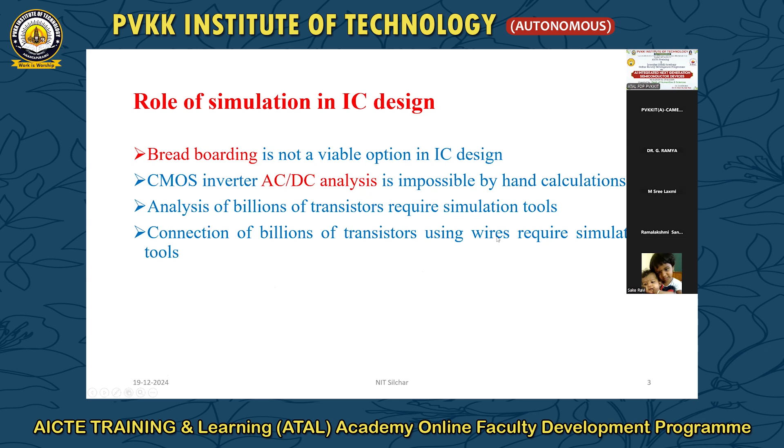Just now I told you that to simulate millions and billions of components, we must use simulation tools. This is the importance of simulation. Now I'll discuss the role of device and interconnect models.

For any simulation tool, the heart of the tool is a model. If the model is accurate, then the simulation results will match the post-fabrication results. If the model is inaccurate and does not describe the behavior of the device or interconnect under all possible conditions, then whatever optimization you do at the circuit level is of no use. The fundamental component, the device model, must be accurate. Only then is there a possibility of simulation results and post-fabrication results matching.

Otherwise, it is not possible to get accurate results as per the specifications given to you.

Every circuit simulator should have built-in models for both devices and interconnects. Interconnects are needed to connect various devices, circuits, and systems. There is a clear role of these interconnects at very high frequencies - they cause various parasitics, RLC components, and lead to crosstalk effects and ringing effects. There is a great role for the discussion of interconnects.

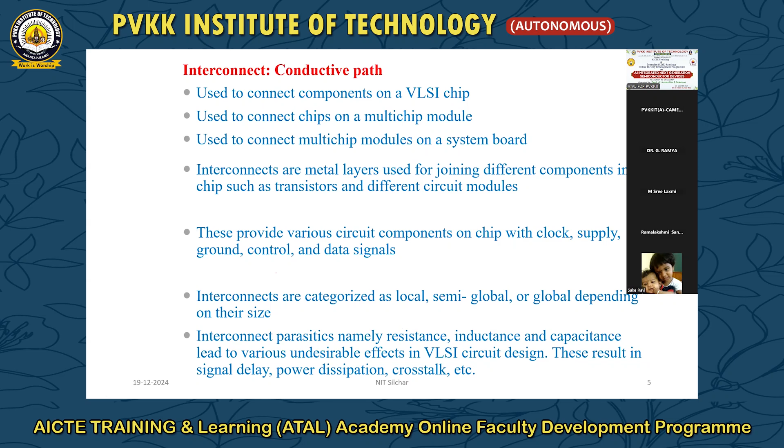Every interconnect has some parasitics, like resistance, inductance, and capacitance. These are the culprits behind the undesirable effects in VLSI circuit design. These lead to delay, power dissipation, crosstalk, and ringing.

I told you about various models. We need an accurate model. The basic model of the interconnect is like a simple wire.

This was valid for long channel devices, where device delay dominates the wire delay. For long channel devices, take MOSFET for example — for long channel devices, device delay is dominating over the wire delay.

Whereas if you go for deep submicron designs, after scaling, the long channel MOSFET becomes a short channel MOSFET. After this scaling, interconnect delay dominates the device delay. For long channel devices existing in the IC or processor, the devices dominate the wire delay.

Whereas for short channel MOSFETs, the current MOSFETs, the interconnect delay is dominating the device delay. Any IC or system needs devices, and we need wires to connect those devices. The overall system consists of devices and wires only.

In the current scenario of deep submicron designs, the wire delay is dominating the device delay. This means overall devices are becoming faster, whereas wires are becoming slower. Our main target is to connect devices using wires, but wires are slower compared to devices, so our target is to make wires faster.

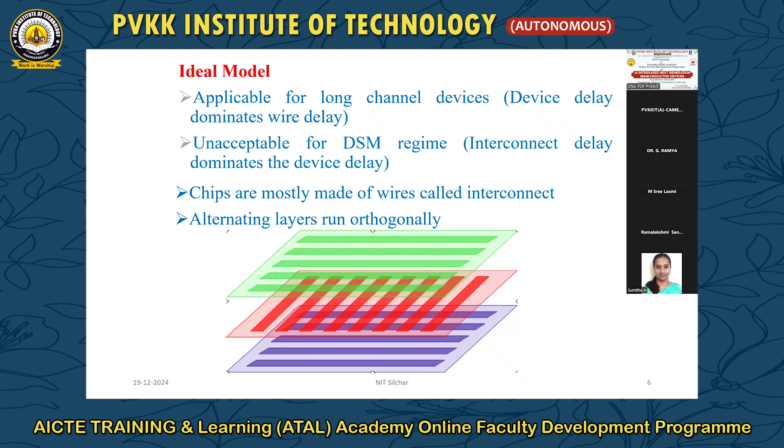Whereas local interconnects, which are used to connect transistors, are very narrow. They are very narrow because we are dealing with nanometer MOSFETs, and accordingly we scale down these local wires.

The way we are scaling down the local wires, we are unable to scale down the global wires, because the global wire lengths especially we are unable to scale down. As compared to the older days, current processors, every year we try to integrate more components to add more functionality.

When more blocks are in the processor compared to a 10-year-back processor, we need a lot of wiring, a lot of power supply wiring, and a lot of clock routing wiring. That is the reason the global wire lengths are unable to scale down the way we are scaling down the lengths of the local interconnects.

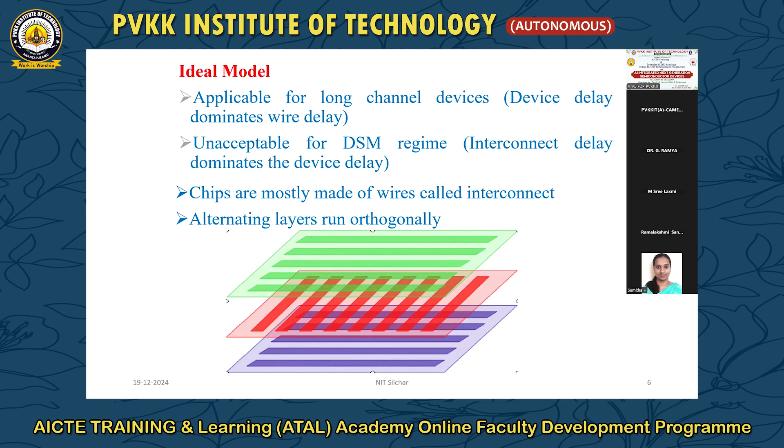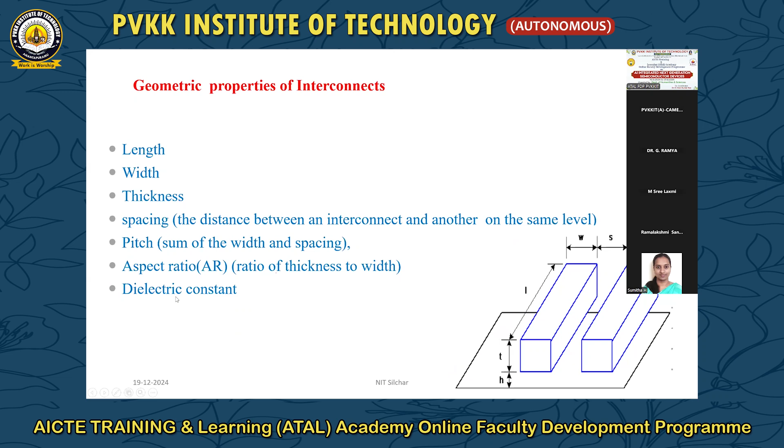These are the main properties of interconnects: length, width, thickness, spacing, pitch, aspect ratio, and dielectric constant.

130 nanometer, 90, 65, 45, 32 nanometer, the y-axis is about the relative delay. The top line describes global interconnects without repeaters. Basically, here we use repeaters, which are used to reduce the delay.

Especially for global interconnects, we use repeaters to reduce the delay. As I told you, wires in current deep submicron design are dominating the device delay. In the entire system, we have devices and wires only, and wires are slower while devices are faster.

But we want to make the entire system faster, so we try to make wires also faster. For that, we try to use repeaters, or otherwise we try to use some innovative interconnects, like optical interconnects, or CNT interconnects, or some flexible interconnects.

As I told you, when we move into deep submicron technologies like 250 nanometer, 180, 130, 90, the top one is the blue one. Global interconnect wire delays keep on increasing. This is the main bottleneck.

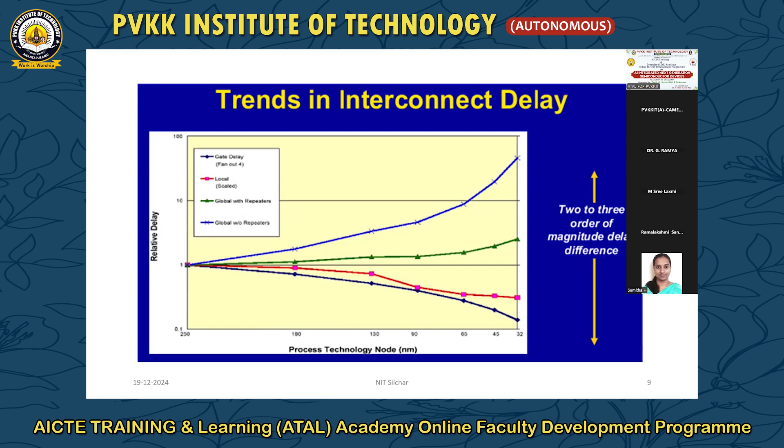And this is about the interconnect delay under different scaling rules. I told you these are the main geometrical parameters like width, thickness, spacing, oxide thickness, length. Here the main conclusion is when we go for scaling, ideal scaling and constant thickness scaling.

Here, local interconnect delays - this is about the local interconnect delay. The crux is, for the short wires, resistance - we take this for any parasitic wire.

I told you there will be RC delay, RLC delay. When we are considering RC delay, the inductance effect is ignored. At low frequencies only we can ignore the effect of inductance, whereas at higher frequencies we must include the effect of inductance also. For short wires, if we are taking RC delay, at lower frequencies your resistance scales by 1 by S, whereas capacitance scales by S.

The entire RC delay is almost the same, because when we scale down the geometries, width is scaled by S parameter, where S equals 0.7, so width is scaled down by 0.7. Thickness also scales down - almost all parameters are scaled down. Then the overall RC delay is almost the same, because R is scaled by 1 by S, C is scaled by S.

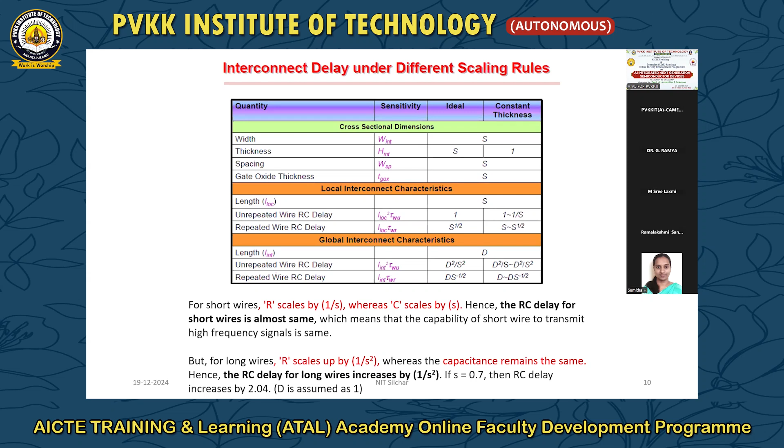With technology scaling, gate delay decreases, whereas wire length increases, and again wire delay also increases.

These effects cannot be removed, meaning we cannot make them zero. In presence of this capacitive effect, inductive effect and parasitic resistance, our signal should have good signal integrity and again power integrity also. Meaning in presence of these RLC components, glitches and noise also, the circuit should have good noise margin.

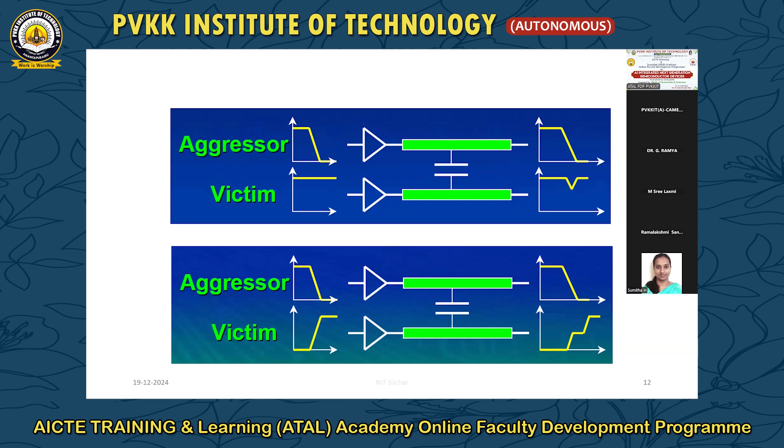When a circuit is having good noise margin, then even the presence of these small glitches cannot affect the output. That is the beauty of digital signals as compared to analog signals.

These are the main challenges: delay uncertainty, overshoot uncertainty, crosstalk uncertainty, power consumption, and electromigration. Basically, electromigration means at a particular point of interconnect, if there is a high amount of current flowing, there will be a high current density. When there is high current density at any point, it leads to migration of molecules and atoms from that point, which leads to opening or shorting of the wire. This is a permanent damage, due to the movement of these particles.

When a wire is open or short, then the corresponding processor blocks may not get sufficient signal. Then it becomes a failure of the corresponding processor. This is the important thing we have to discuss about regarding reliability issues.

And these are the main challenges: power consumption and crosstalk uncertainty. Delay uncertainty and crosstalk uncertainty mean that for any wire, local or global, once we apply some signal, exactly after how much time the signal will be available, we cannot estimate precisely, especially in current deep submicron level designs.

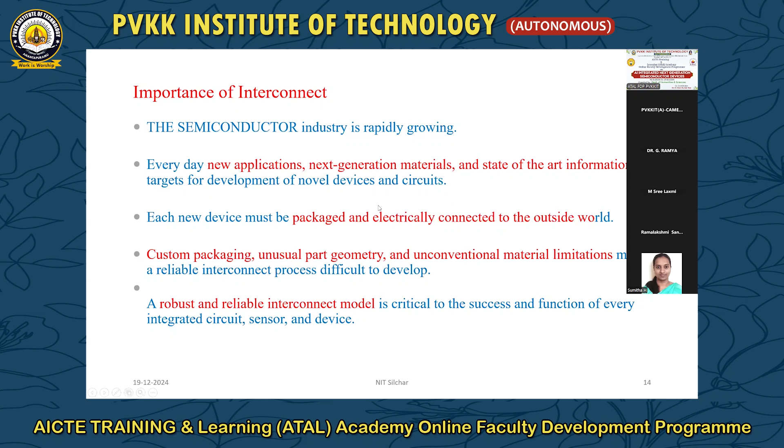And these are the major issues in interconnect delay. Wires are generally placed very close to each other because there is no other option, since wafer area is very costly. We try to integrate wires and devices closer. But if you keep them closer, there will be more parasitic effects like coupling capacitance and mutual inductance. If you separate the distance, these effects will be nullified, but we always try to go for area efficient designs.

Always there is a trade-off. That is the reason we need some optimal geometry, optimal spacing of wires. If we place wires very close together, there will be large coupling capacitance and large mutual inductance, which leads to higher crosstalk noise, and that leads to crosstalk induced delay. These are the multiple effects we will be having.

There are multiple models: simple short model, simple capacitance model, RC model, RLC model, RLC with frequency dependent parameters, transmission line model, coupled transmission line model, and full EM analysis of coupled elements. As we move from the simple short model to full EM analysis, accuracy will be good, but it takes more computation time. Full EM analysis means we must use numerical methods like finite difference time domain method, or finite element method. If you use those methods, the accuracy will be good.

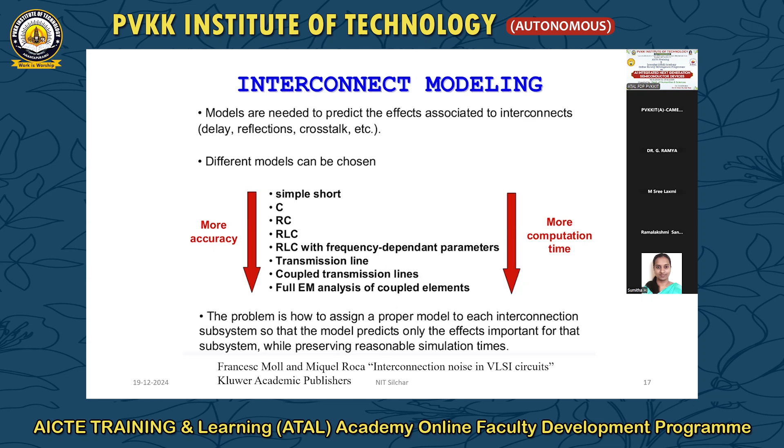This is the main important point. Whatever important effects we need, that has to be predicted. If you want to predict all the performance parameters and it should be more accurate, then the model needs all the parameters. To run all the parameters, we need a lot of computation time. Always there is a compromise between accuracy and computation time.

These are the various existing models: Elmore model, Bakoglu and Sakurai, like this. This is a very old model, the Elmore delay model, and here is the fundamental equation of the Elmore delay model. This is valid only for short interconnects, and the model is purely based on RC interconnects, where the delay is directly quadratically proportional to the length.

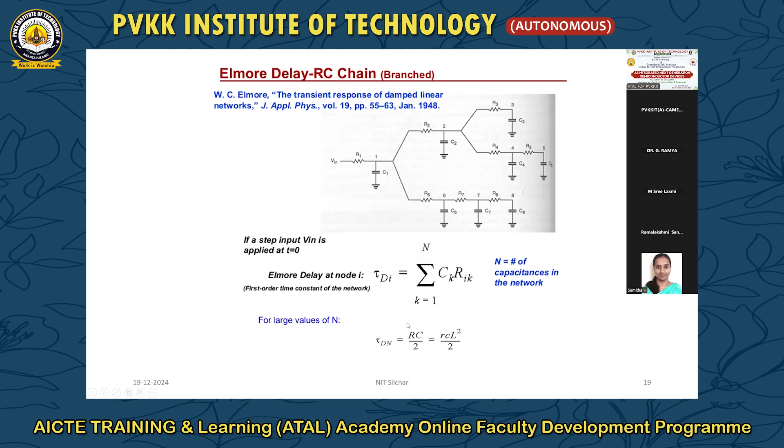Another model here: in case of RC delay, Elmore RC delay increases quadratically with its length. We have observed that the insertion of a buffer reduces the delay proportional to its length. Instead of varying quadratically with length, now the delay is proportional to its length. Observe the difference here. If we add repeaters at different points of the wire, instead of increasing the wire delay quadratically, it will vary linearly with the length.

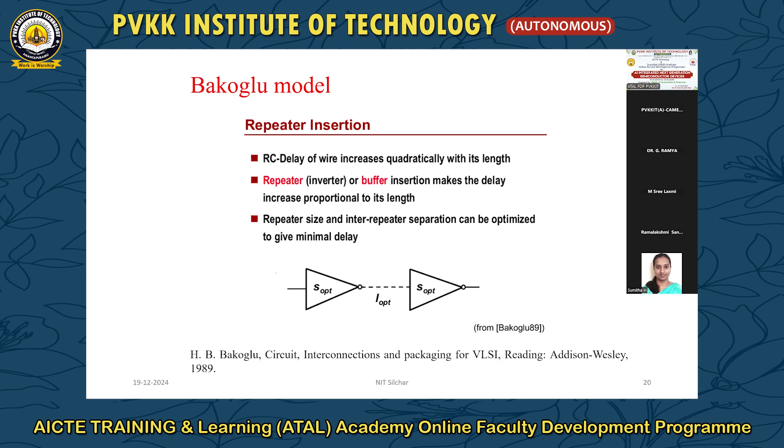This is the big difference between having repeaters and not having repeaters. Repeater size and inter-repeater separation can be optimized to get the minimal delay. And another model is the Sakurai delay model, where they have estimated the crosstalk.

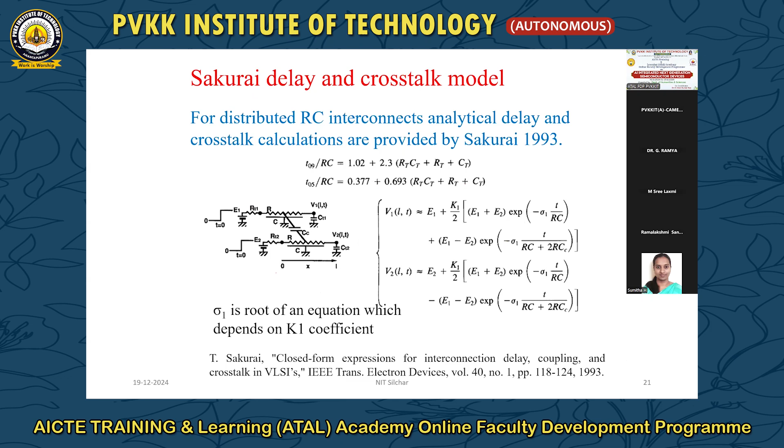And this is about another model, the RLC model. Till now, whatever I have discussed, RC models have delay estimation error very high, almost 100% error also there. Whereas if you include the effect of inductance, then the delay estimation error will be within 15% only.

And our main intention, our target, is to get the delay estimation accuracy to be almost 99%. Meaning the mathematical model we develop has to give results correctly matching the simulation tools, or otherwise, fabrication results.

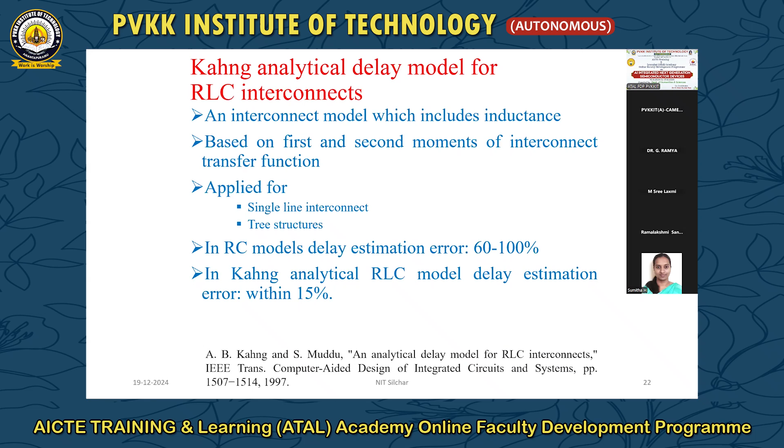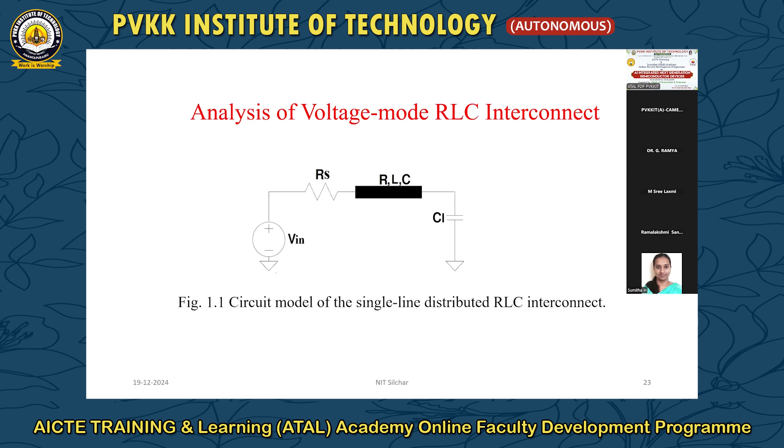Okay, now we'll discuss the simple structure, voltage mode RLC interconnect, and these are the basic telegrapher's equations. The variation of voltage here is a function of x and s. X is nothing but the position, S is our Laplace parameter. These are the variation of voltage and variation of current, which are purely based on the RLC components only.

And the solution of this equation is written as an exponential matrix, where phi is nothing but 0 minus z minus y 0. These are impedance and admittance. Z is impedance, Y is admittance. Z is impedance R plus SL, Y is admittance SC, where L is the length of the interconnect.

Here we have taken V of L comma S as the far end output voltage, and the far end current is a function of the near end voltage and current. This first equation has an exact representation, and this is the frequency domain solution.

And there are some models here. The function is in the form of some cos hyperbolic and sin hyperbolic, where z and y are nothing but R plus SL into SC.

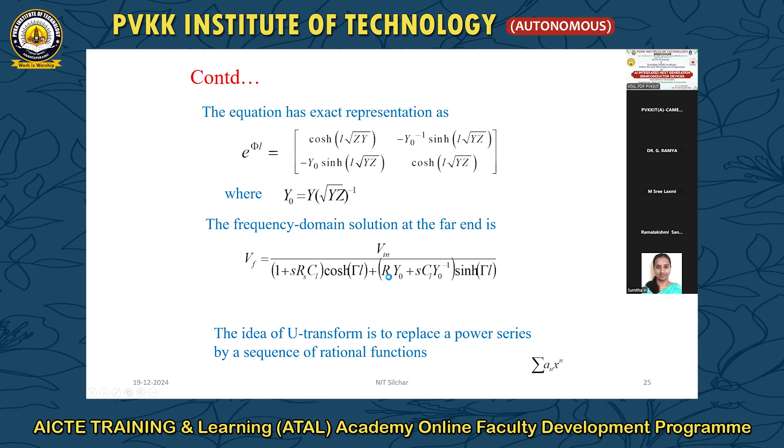This is about the U transform, where we try to use some approximate function such that the transfer function, this is our transfer function, output by input, will be simplified so that we get the time domain function in a simpler fashion. We use this transform where the time domain function is represented in the form of some poles.

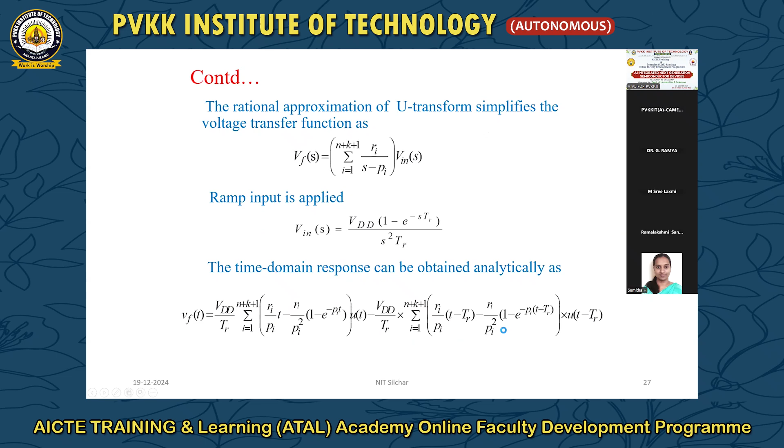Where pi, these are poles only, and these are the parameters, interconnect parameters, and power supply.

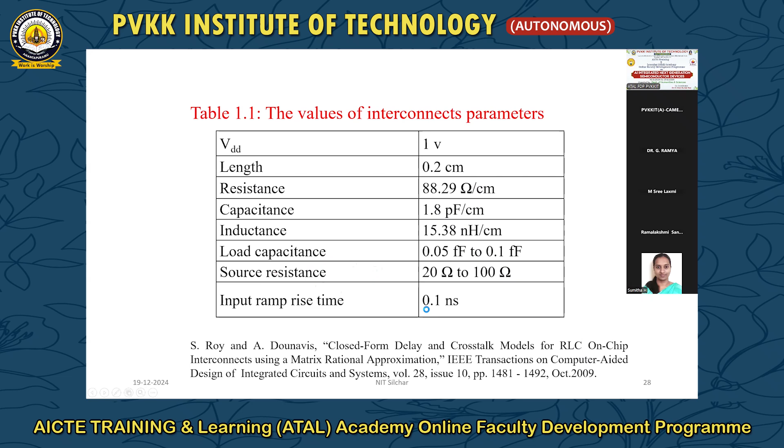This is VDD, length typically we have taken 0.2 centimeter. These are the parasitic capacitances. If you observe, these parasitic capacitances are nothing but per unit length parameters. And load capacitance we have varied, source resistance we have varied, and input ramp we have taken with a rise time of 0.1 nanoseconds.

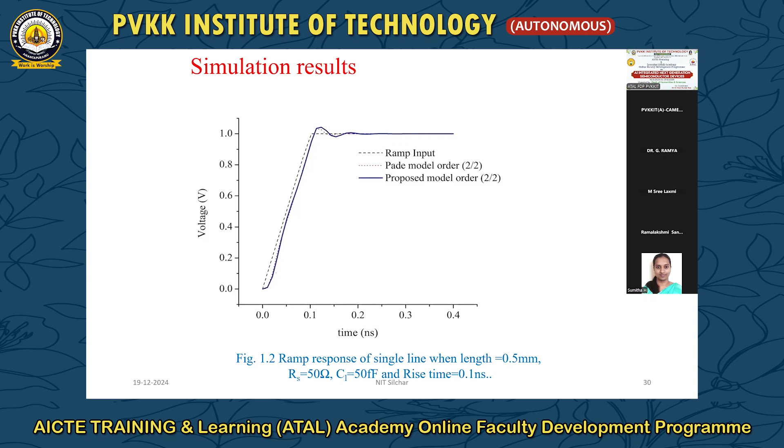And these are the advantages, and these are the ramp response. Ramp response of a single wire, and these are the proposed models. Here if you observe, there is a difference between input and output, that is called propagation delay. Propagation delay means the point where input touches 50% of the peak, and the point where output touches 50% of the peak - the difference is called propagation delay.

Previously I discussed about the single wire. Now this is our H-tree structure, an H-shaped structure where we have multiple nodes. The advantage of the H-tree structure is for clock source - when we apply clock source at the initial point, at various nodes we will be getting the clock with equal delay, same delay.

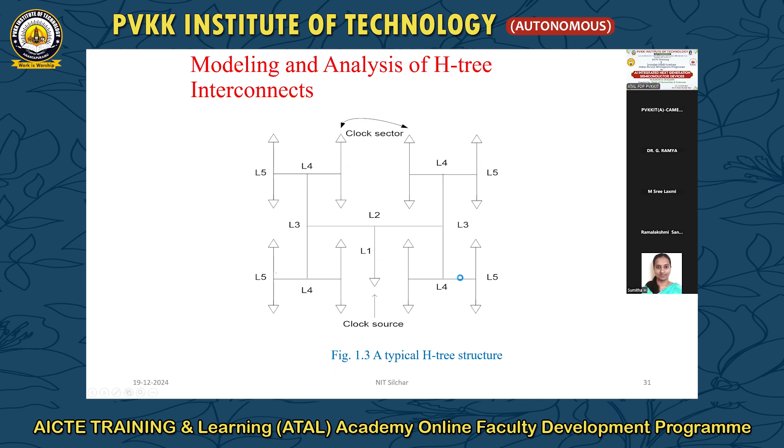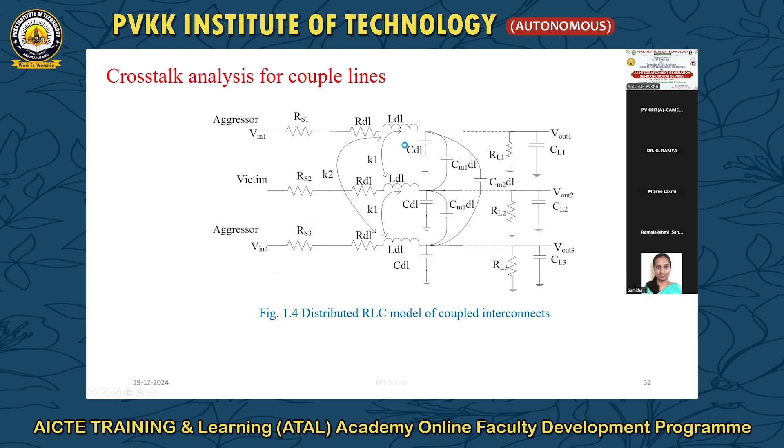And this is about when we are having multiple wires. This is our mathematical analysis where we try to find out the crosstalk from one wire to another wire. When there are multiple lines, these are the parasitic components, and these are the capacitive means - coupling capacitance are there, and mutual inductance, self inductance are there.

From one wire, we have taken three wires. For three wires, there will be some capacitance and inductance parameters, and again these are the wire resistances, and we observe these are distributed parameters, not lumped parameters. At low frequencies only we can use lumped analysis, whereas for higher frequencies we must use distributed parameters.

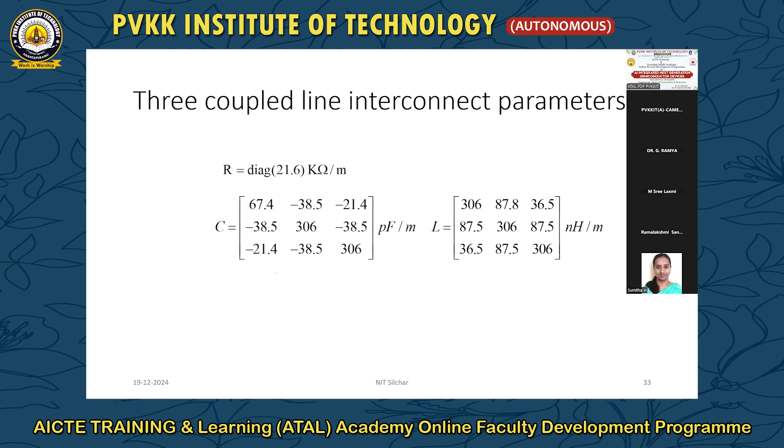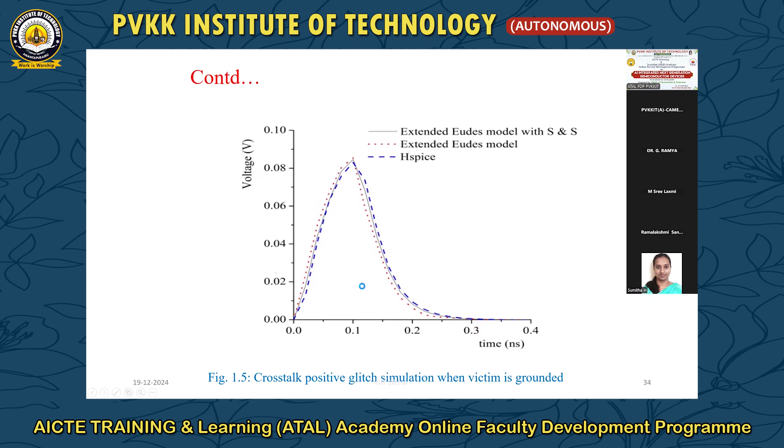And this is about the noise crosstalk positive glitch simulation. When victim is grounded, instead of zero signal, we are getting some noise. This noise is due to the electrical and magnetic field coupling only.

Till now we have used copper interconnects. Copper interconnects suffer from significant electromigration problems and higher resistivity that leads to higher RC delay. Overall delay will be more if we use copper interconnects, and they have other hurdles like burnout time at current density of 80 megaAmpere per centimeter square. There is a burnout time of copper, and even though it has some good advantages, because of these problems - burnout time and higher delay and electromigration problem -

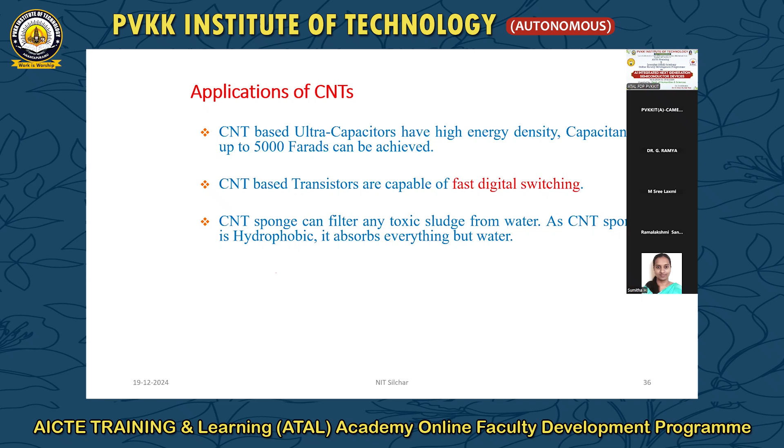we go for CNTs, carbon nanotubes. These are used for fast digital switching, and this is nothing but CNTs as interconnects. These have different versions: graphene, single wall nanotube, multi wall nanotube. These are possible replacements for copper interconnects due to their large conductivity. If conductivity is large, then resistance will be less, and they are faster also. For higher switching applications we use these CNT interconnects, but these are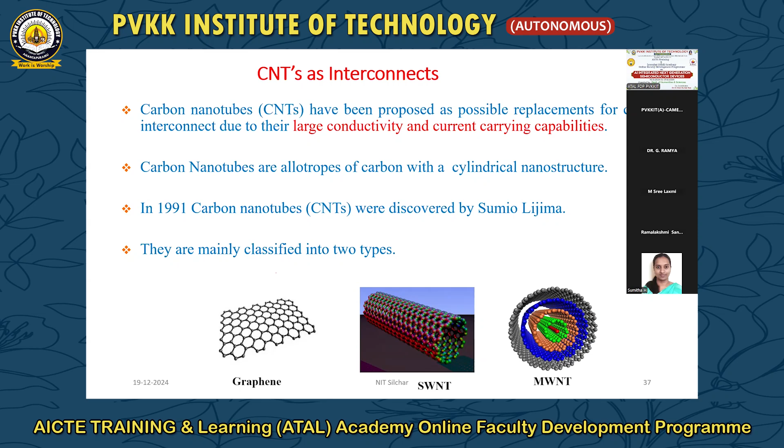allotropes of carbon with a cylindrical nanostructure, and these are the main properties of CNTs. They have very low resistivity, higher conductivity, good current carrying capacity, and very good temperature stability - almost 2800 degrees Celsius in vacuum and about 750 degrees Celsius in air.

And these are one dimensional, and they carry large current, almost 1000 times more than copper. Their burnout time is very high here. They are able to withstand even large current density, almost 1000 times more than copper, because

the main problem is when we go for high-end systems, supercomputers, where people are trying to work with high amounts of computing. For high amounts of computing, we need lots of computations, meaning lots of power supply. For that, electromigration problems may occur for copper wires, where the wires on the processor may burn out. As I told you just now, at any point if current density is very high, that leads to movement of molecules and atoms, which leads to opening or shorting of the wire. That is the problem of the copper wire.

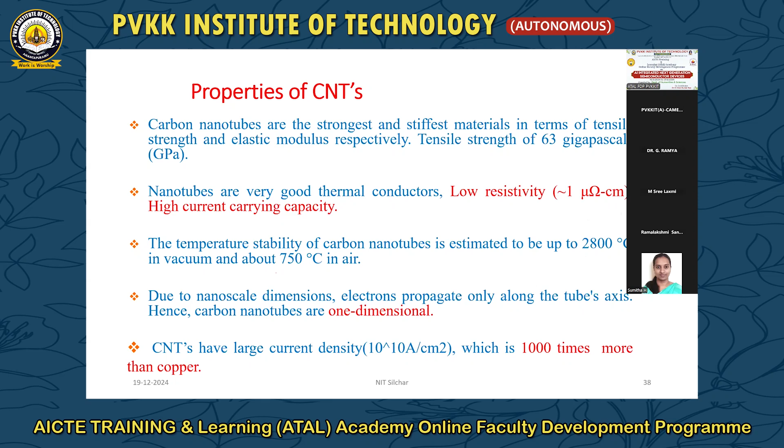And this is the model of CNT interconnects, simple CNT interconnects, and these are the various parameters. Here also we use RLC modeling only.

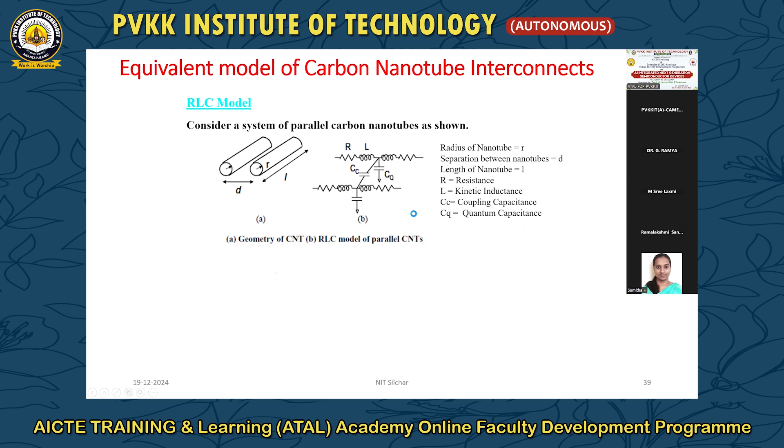Now I'll discuss ML based physical VLSI physical design. These are the main crux. Employing AI and ML algorithms in VLSI design and manufacturing reduces the time and effort. Especially time and effort means, when we try to integrate ML algorithms with the current existing tools, they are able to work in a faster way. ML based tools are an alternative to the current simulation tools in terms of good accuracy and very less computation time.

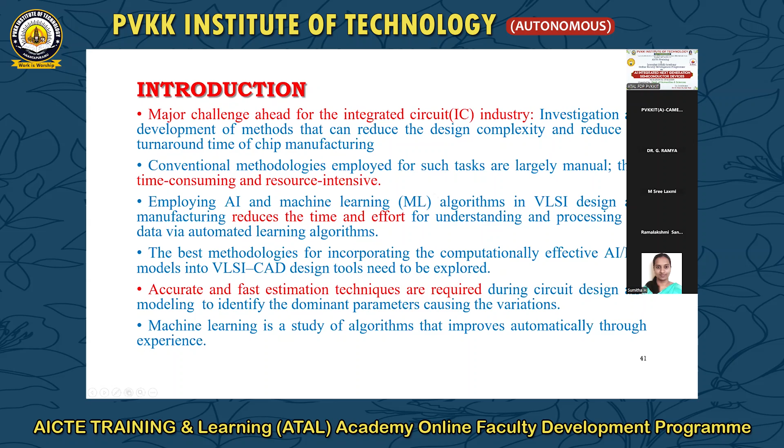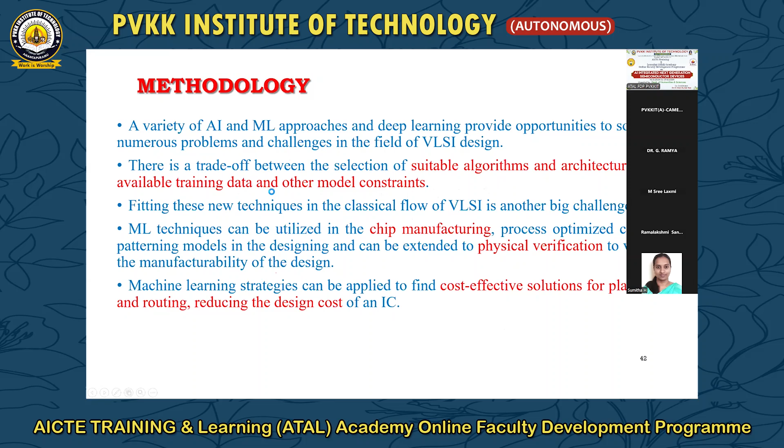And there is always a trade-off between the selection of various ML algorithms and architectures with available training data and other model constraints. And this is the flow chart of the ML model.

For ML we need a data set. We try to get the data set from the HSpice netlist or maybe Cadence netlist. That data then we have to process.

Then after that we do normalization, to normalize the input and response values, because some input parameters are like rise time. Suppose rise time, I have taken rise time as 0.1 nanoseconds. Length I have taken as a couple of millimeters - millimeter means 10 power minus 3. Rise time is 10 power minus 9. Voltage I have taken as another input parameter, volts. Different inputs with different ranges. That is the reason if you normalize all these input parameters, then it will be good.

The model will be more effective. That is the reason we must normalize all the inputs such that the data will be in a proper format, and we have to separate the data into training data and testing data, and we use some modeling, meaning we have to train the model. Then model evaluation we should do.

And if we are getting the desired accuracy, then that is the final AI model. If the corresponding model is not able to predict - maybe device delay or power dissipation, or whatever performance parameter you take - if it is not predicting, then you go back to the ML model, and you just optimize the corresponding parameters till you get good accuracy.

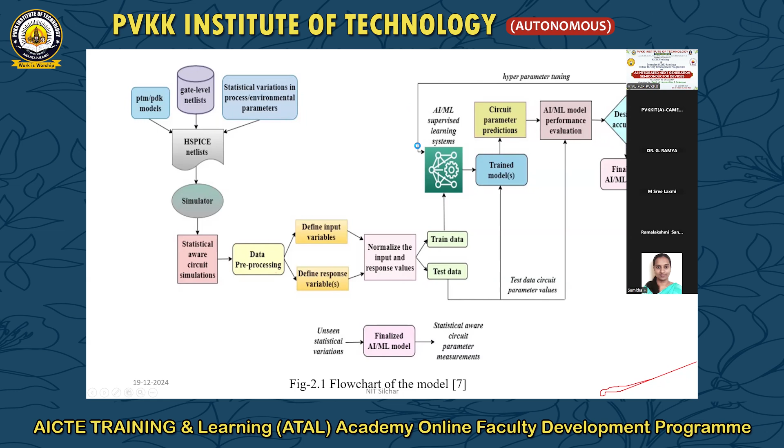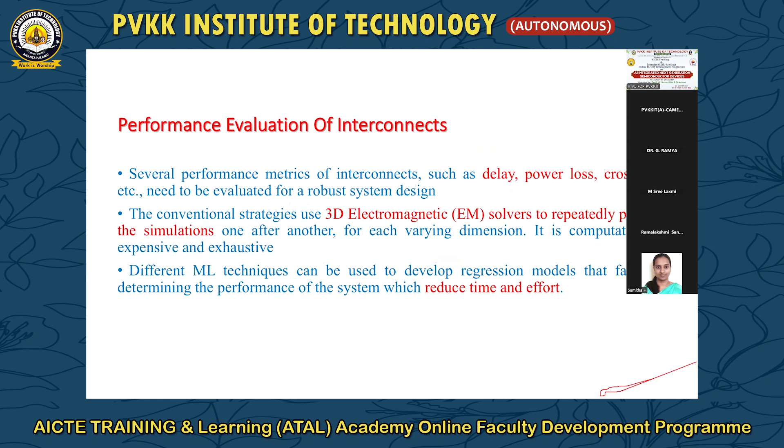These are the several performance parameters like delay, power, crosstalk, and different ML techniques we use. Our main intention is to reduce the computation time with good accuracy, and this is about the optimization.

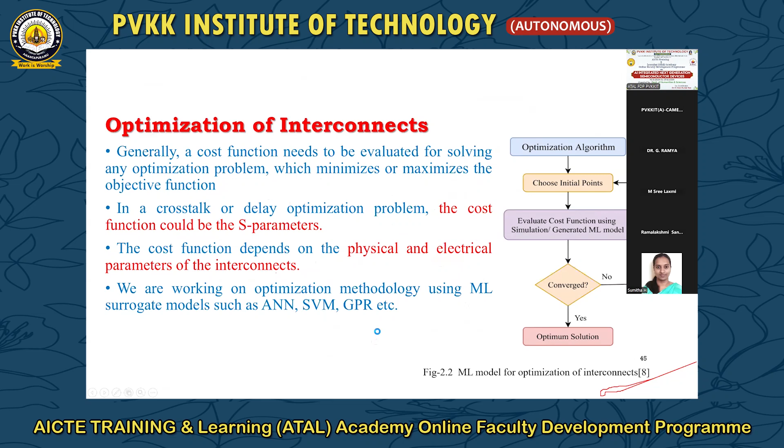We use various surrogate models like ANN, SVM, GPR. Here data mining and ML build a model based on sample data called training data, and we try to get predictions and decisions without specifically programming. Data mining is also about algorithms, but data will be explored through unsupervised learning.

We try to collect the data from existing simulation tools, and the corresponding data we use to train the model. We use one technique called clustering, where a simple example I have taken is a transmission line having multiple poles.

We use some clustering technique such that we try to find out the dominant pole. The dominant pole decides the performance, where we try to compare the performance with the exact performance, and there will always be some accuracy issue, but we try to compromise between accuracy and computation time.

We use clustering technique. This is a simple example I have taken, like a fourth order system with poles -1, -2, -3, -4, that we are converting into the dominant pole cluster and next dominant pole cluster. Then it becomes a second order system. The fourth order system takes more time, so we use pole clustering technique to reduce the order of the system.

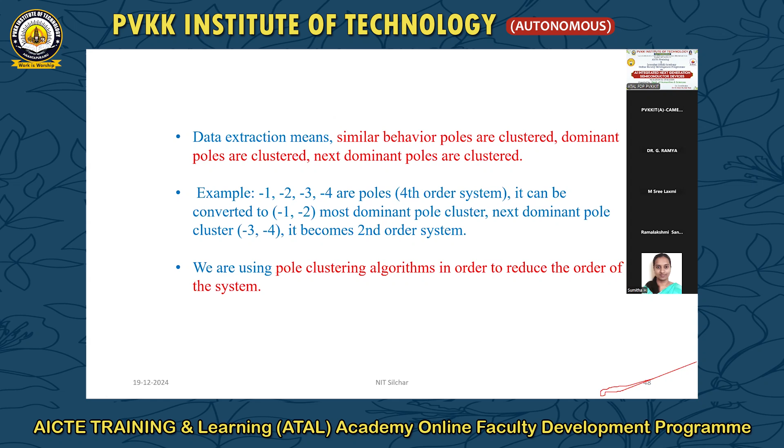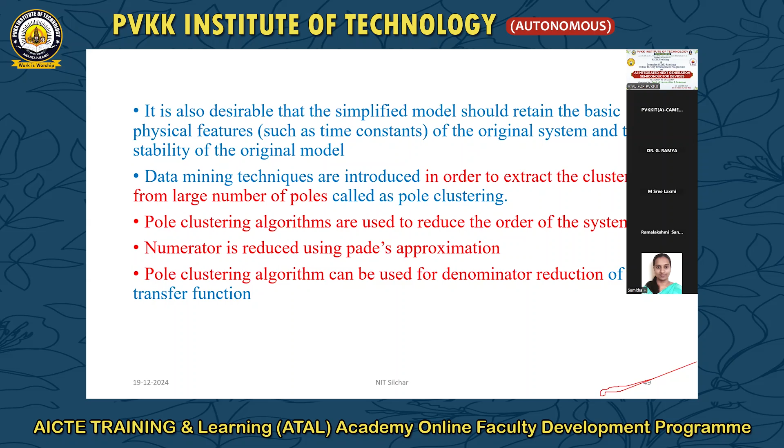We use pole clustering technique to reduce the order of the system, and the numerator is reduced using Pade approximation, where complex functions, exponential functions will be reduced into much simpler form. We use ML-based pole clustering technique and another approximation technique, such that the overall system transfer function will be simplified.

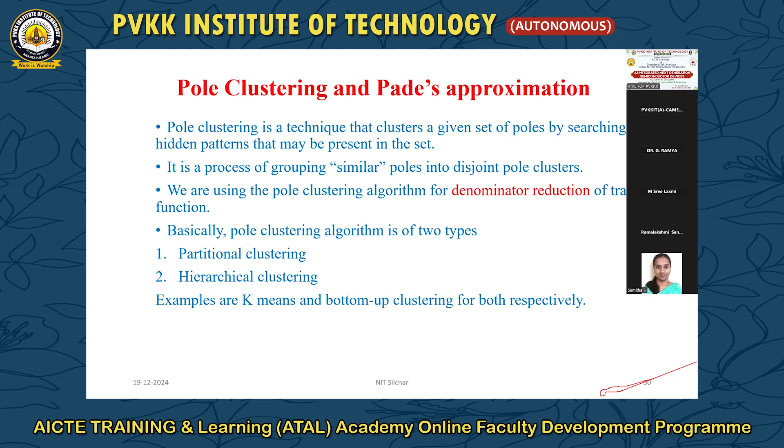The performance parameters, whatever we want, we get with good accuracy. At the same time, the corresponding model results are computationally fast as compared to the Cadence or HSPICE Synopsys results.

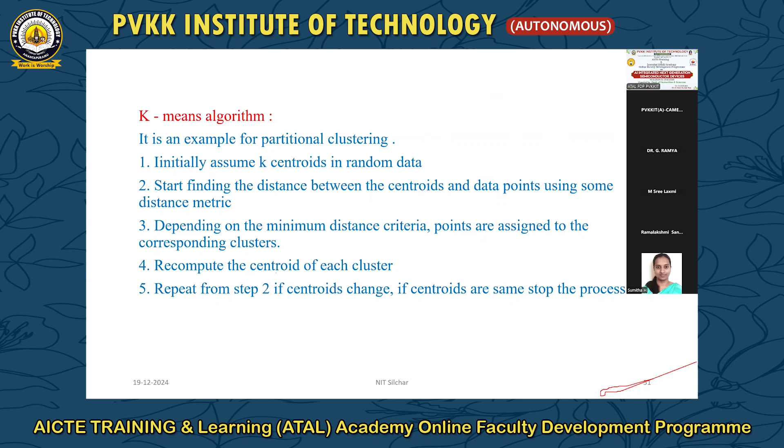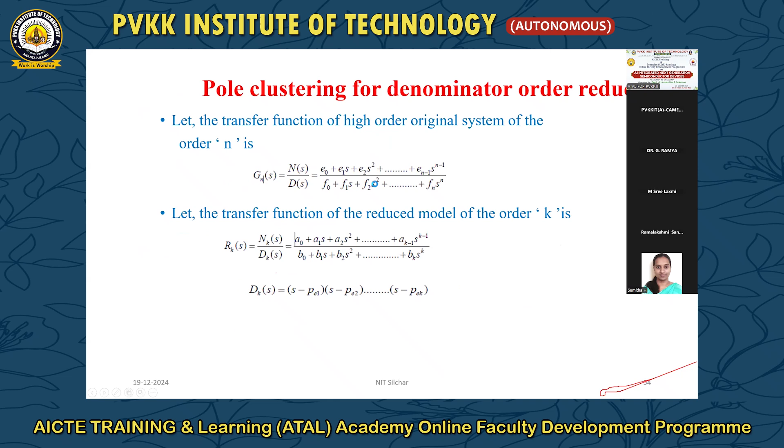This is about finding the cluster points, the centroid. We have used K-means algorithm and hierarchical clustering algorithm. This is the transfer function with a generic higher order original system. For the numerator we are using Pade approximation, for the denominator, pole clustering technique. And this is the algorithm.

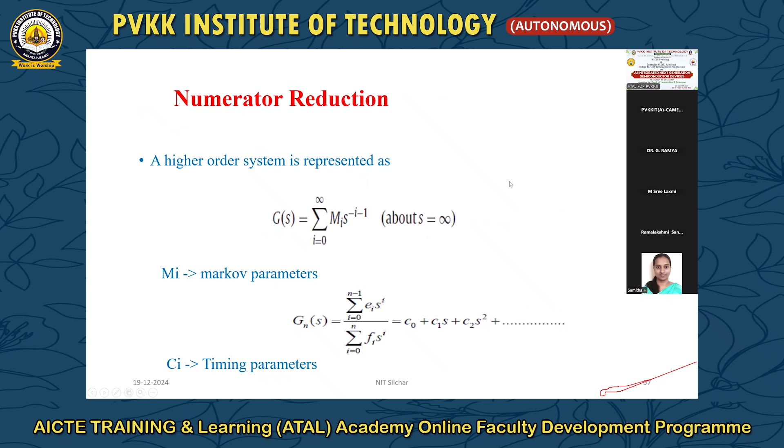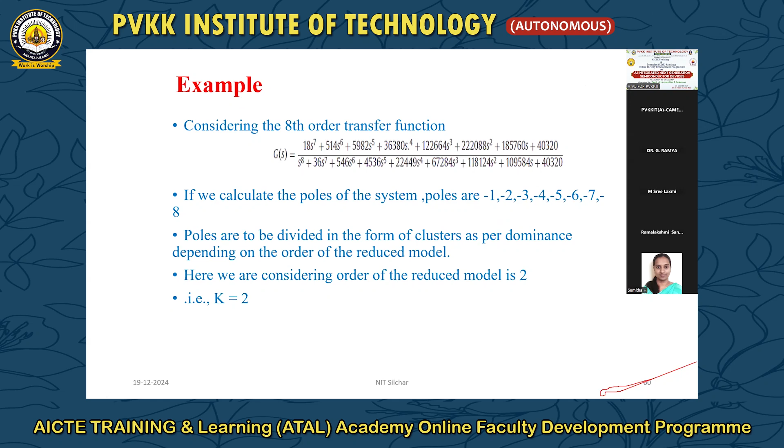Numerator reduction, this is the algorithm. This is a simple eighth order system we have taken, with eight poles. Our main intention is to reduce it to second order. For that, we found the first cluster center is -1.06, and the second cluster center is -5.13. The overall reduced denominator, instead of eighth order, is converted into second order.

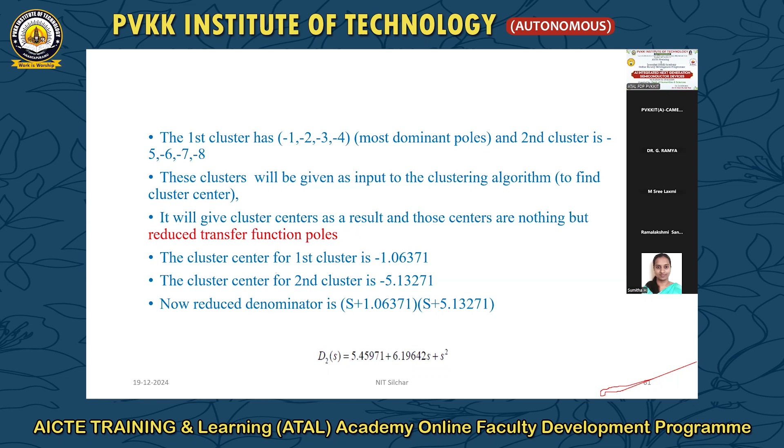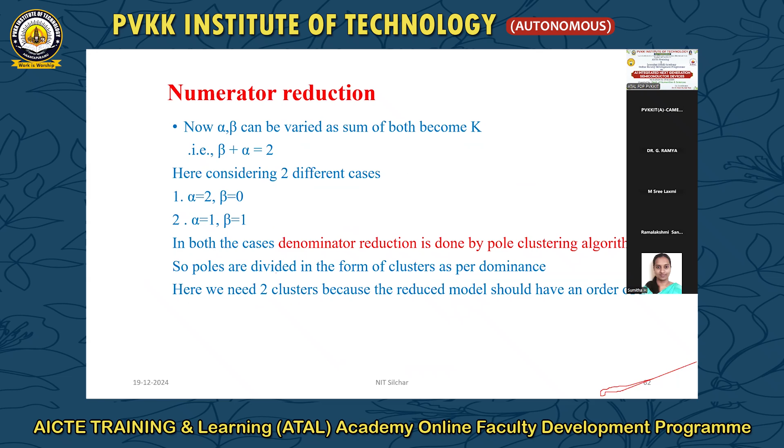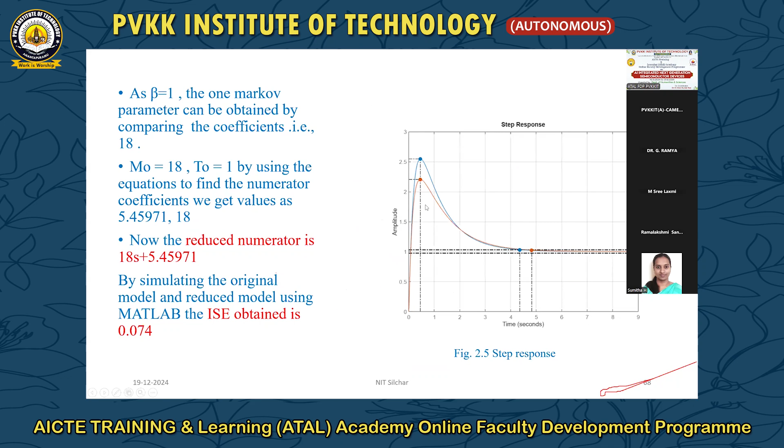These cluster centers of the first and second clusters are nothing but the dominant poles, which try to give the approximate behavior of the transfer function. Similarly, we use reduction for the numerator also, using the Pade approximation. This is about the step response - there will be some error, but the corresponding computations are much faster compared to the simulation tools.

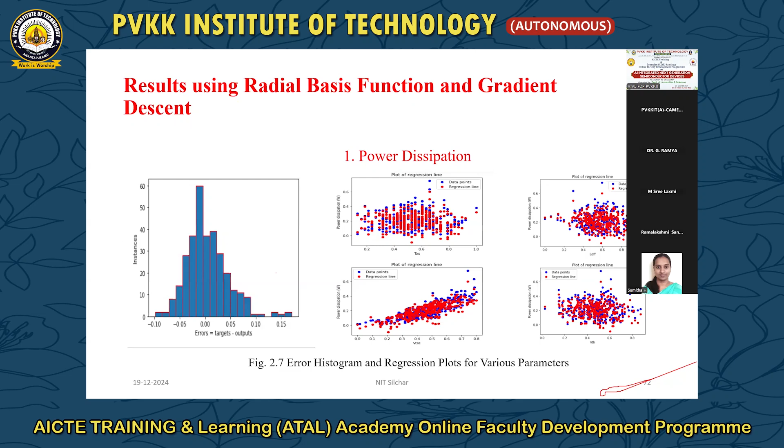These are the results using regression models - about the power dissipation and various delay plots using different functions.

Next is about signal integrity and power integrity. Signal integrity is the ability of the system to transmit signals with minimal noise and distortion. Power integrity means we try to transmit power with very minimal deviations - there should be constant power supply to each and every block. That is our main target for power integrity.

Whereas poor power integrity and signal integrity leads to some distortion, timing errors, and failures, our main intention is to develop ML techniques where we try to achieve good signal integrity and power integrity.

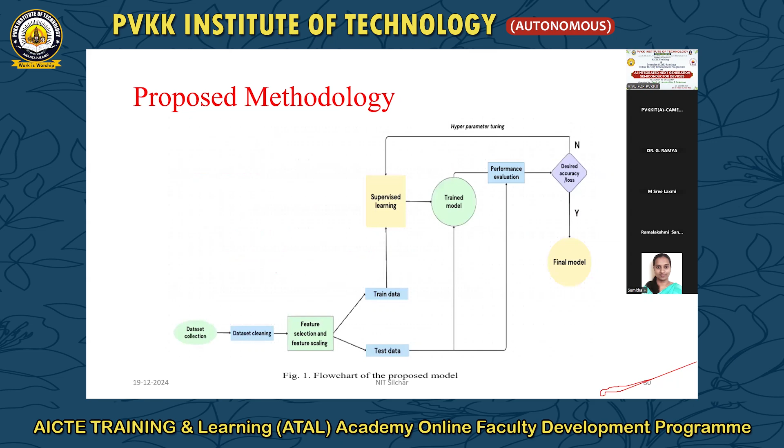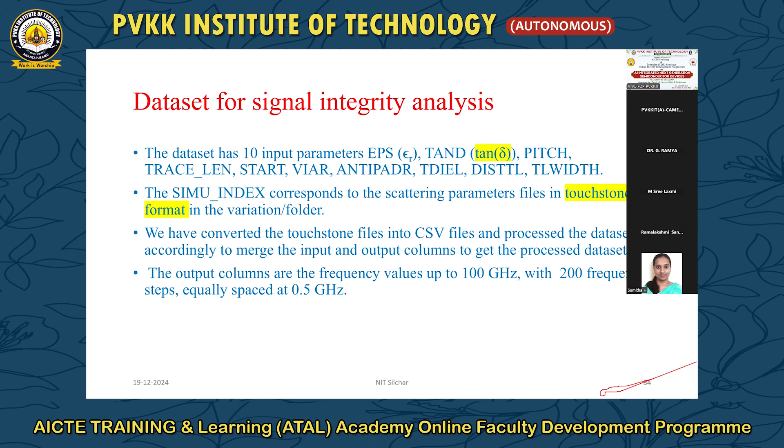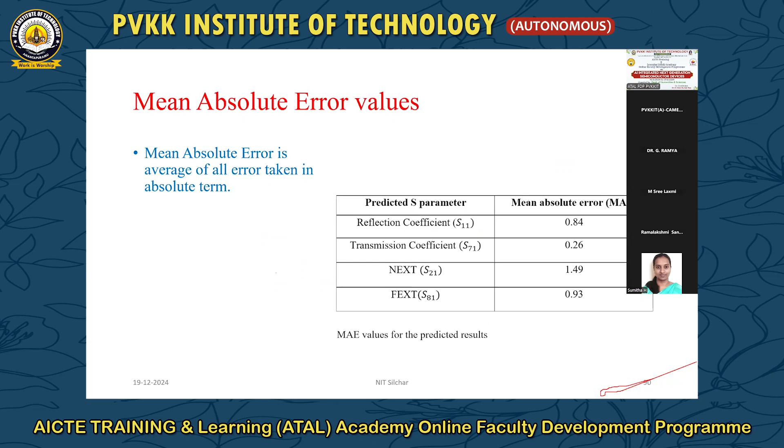This is the proposed model. These are about the ANN, and this is our data set, covering various geometries, the reflection coefficient, the transmission coefficient, the errors, and the various functions.

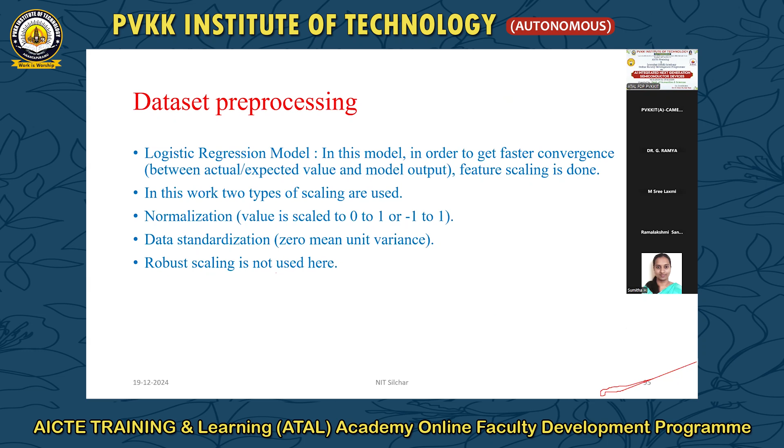Now, the ANN model for power integrity. Initially we developed the database using existing tools only, and after that we trained our model.

Next is about the CU-CNT interconnects. Initially I discussed about copper interconnects, then we moved to CNT, and later we moved to CU-CNT interconnects.

The main problem is that in case of copper interconnects, propagation delay was more and electromigration problems are there. At higher current density, burnout is happening for copper interconnects. To avoid these problems, we moved to CNT interconnects.

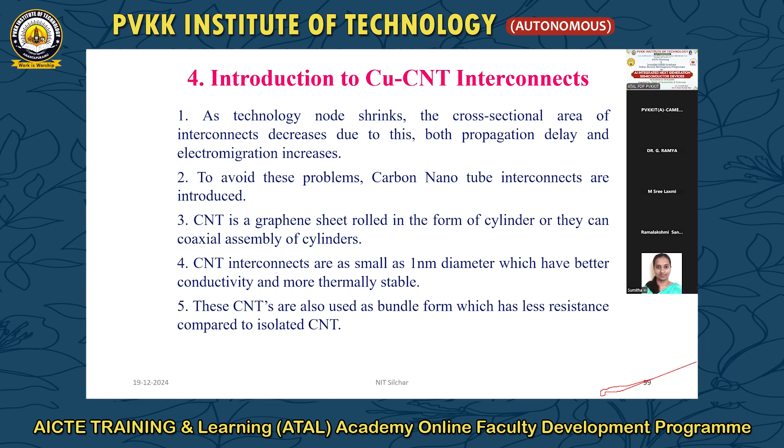But there are some problems, some drawbacks of CNT interconnects. Then we try to go for the CU-CNT interconnects.

Where we have done some optimal repeater insertion. We try to find out the optimal repeater insertion. If you are using optimal number of repeaters for the global interconnects, then your delay will be less. We have used the PSO algorithm to find out the optimal number of repeaters such that delay will be less.

For any system, we try to have very less delay. If you are randomly selecting the random number of repeaters at random locations, that may not lead to the minimal delay.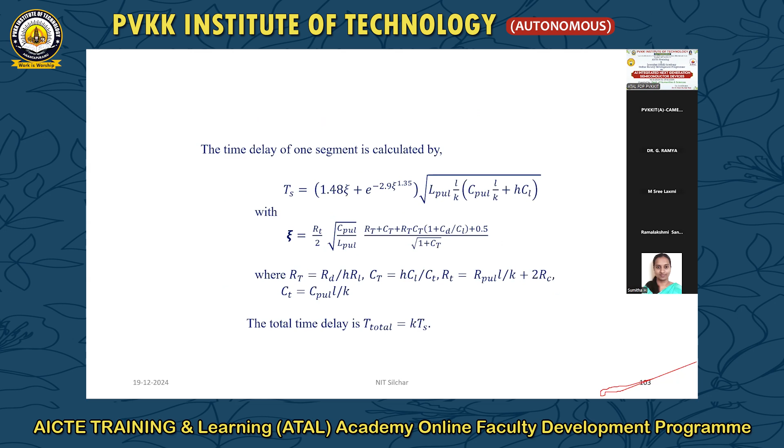Next is about the single event transient. These are about the transient effect. If there is any temporary and unintended disturbance or change in behavior, it's something like an electromagnetic pulse, or a radioactive particle striking. We analyze how the electron hole pairs will be generated, maybe in terms of device or interconnect.

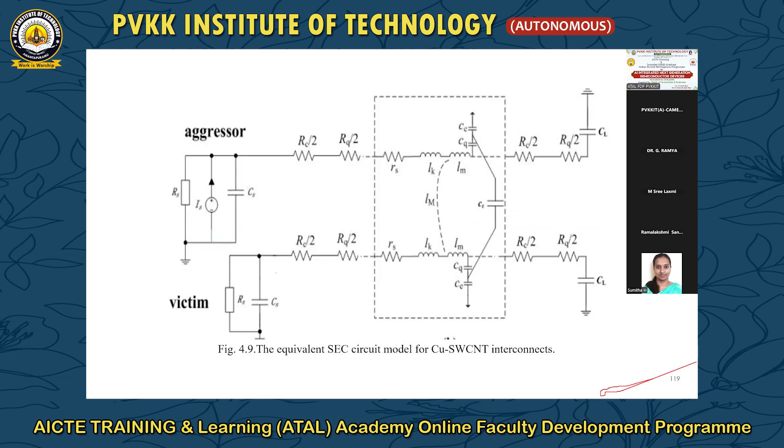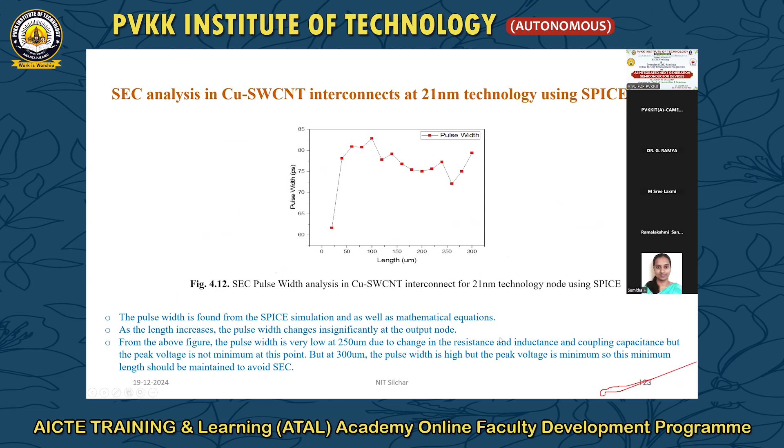If there is an unintentional electromagnetic pulse, we have modeled that as a signal, and then found the analysis. This is at various technologies, 21 nanometer and 14 nanometer technology.

This work we are still doing. And this is about the power distribution, power delivery network. I told you the main goal of the PDN is to provide sufficient power lines to power the active device on the die, without power fluctuations.

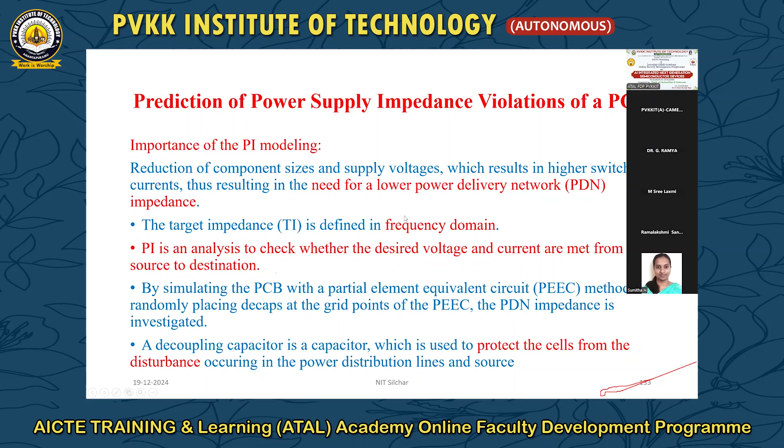Actually, a lot of things are there, but I have another appointment also, so another meeting is there. I'll wind up.

And this is about another domain, stretchable, flexible platform for mechanical and electrical collaborative design. This is the stretchable interconnect block diagram, where for mechanical analysis we use ANSYS, whereas for electrical analysis we use cadence.

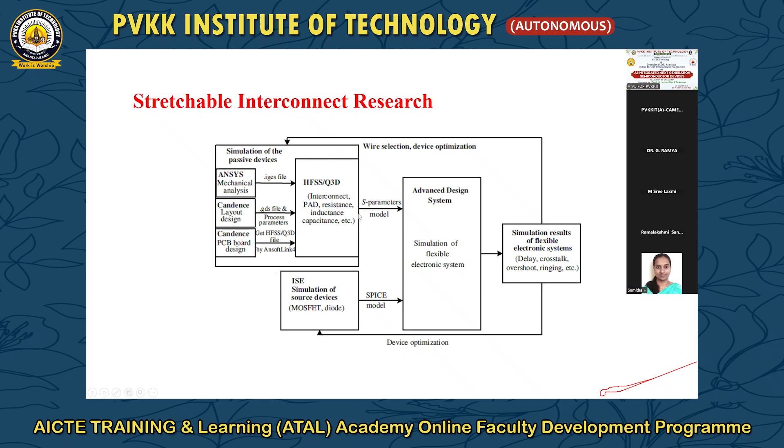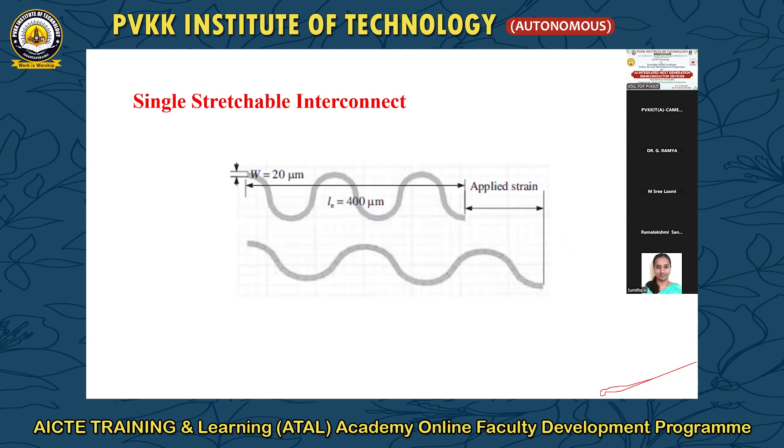For the overall entire system, we try to find out the delay and crosstalk for the stretchable interconnects, with different bendings and different stretching angles. We try to find the device corresponding wire delay and ringing overshoot effects. We basically use the HFSS and Q3D simulators. This is about the stretchable interconnect and corresponding transient response.